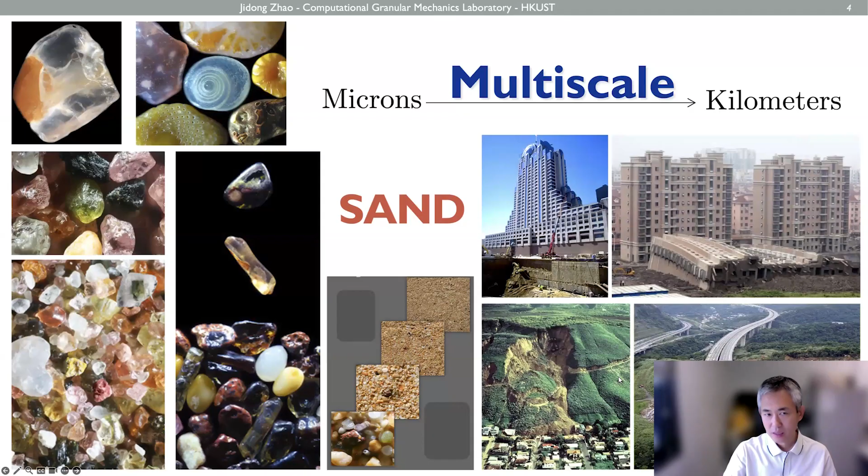Another nature is multi-physics. Granular media is quite often a porous media, and the pores can be filled partially or fully saturated with water. These different phases of fluid can interact with the sand particles in a quite complicated way, with significant engineering impact.

So the focus of my talk today will be on these two aspects. First, how we can do multi-scale modeling of sand. I first wish to present this multi-scale problem.

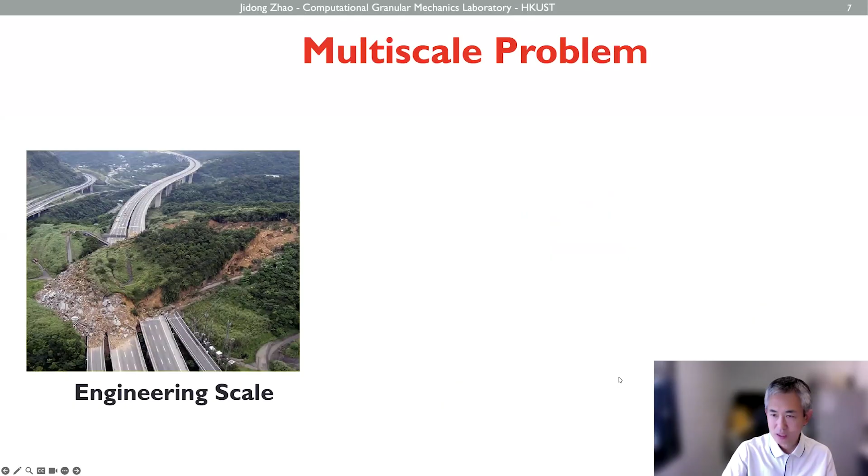We have a typical engineering problem like an engineering slope and landslide. That scale typically has a scale like several hundred meters and even over 1 kilometer.

Another scale that we typically deal with is the laboratory scale, where we take a soil sample to the lab, prepare samples, and do tests to obtain data. This kind of sample we call a representative volume element, or RVE.

Then going back down to the particle scale, there's the grain scale. The length scale ranges from kilometers down to the meso scale, typically less than 1 meter, down to 30, 40, even 50 centimeters, and then to the micro scale at the grain scale, which is a sub-millimeter scale.

So this multi-scale problem is quite challenging. The length scale has a range of 7 or 8 orders of magnitude.

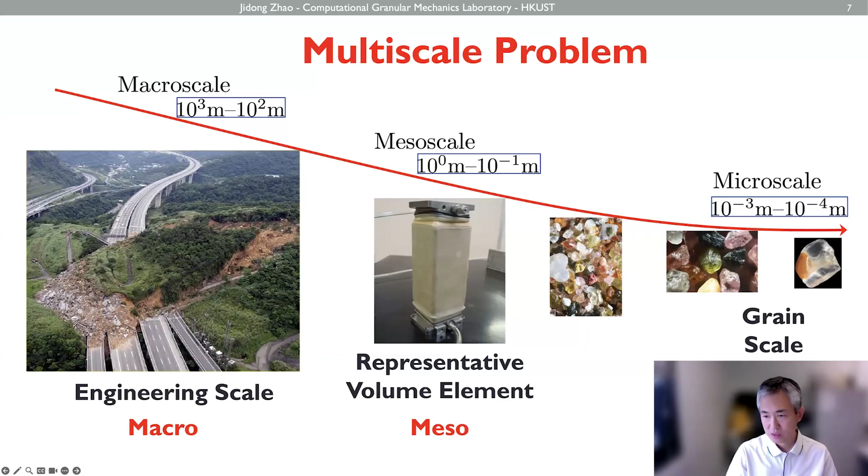Typically we give terms: the engineering scale we call macro, the RVE scale we call meso, and the grain scale we call micro here.

Traditionally, how do we deal with this multi-scale problem? We deal with engineering scale problems using so-called continuum mechanics.

For example, we propose a constitutive model, calibrate it using mesoscale RVE laboratory tests, and then implement the model into numerical code like FEM, MPM, or SPH to solve the engineering problem.

As Professor Ratna discussed yesterday, DEM basically offers a typical micromechanics approach for us to study the particle-scale physics of granular media and collectively evaluate their homogeneous response.

Typically we can use DEM, and sometimes people use MD or a physics engine for that purpose. So these are the different methods people use here.

For the continuum approach, the typical way people follow for an engineering problem is first to define the problem: whether it's quasi-static or dynamic, small or large deformation, whether we need to deal with strain localization and discontinuous deformation, or consider structure interaction, cracking, or multi-phase problems. These are the engineering problem natures we need to define.

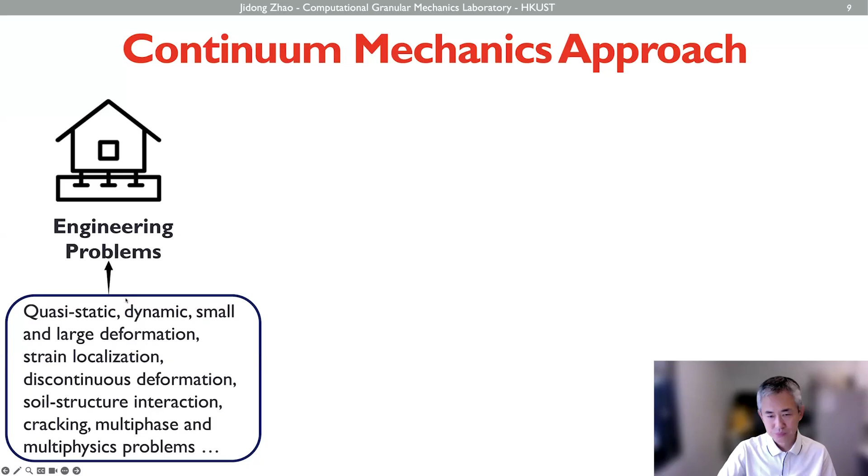Then we choose the proper numerical tools, including FEM, SPFEM which is basically smooth particle FEM, a variation of FEM, or XFEM which is suitable for fracture or discontinuous deformation simulations, or MPM, SPH, EFM, and others.

Once we do that, a key point is that in this continuum approach, at certain points like the FEM Gaussian integration point, we need to assume a constitutive model to represent the constitutive response of this continuum medium, typically based on continuum medium theory.

And then we consider either rate independent or rate dependent constitutive models and other features. We put this constitutive model at the Gaussian integration point. Then, of course, the model parameters need to be calibrated, and then we solve the problem and get numerical results. This is what we do here.

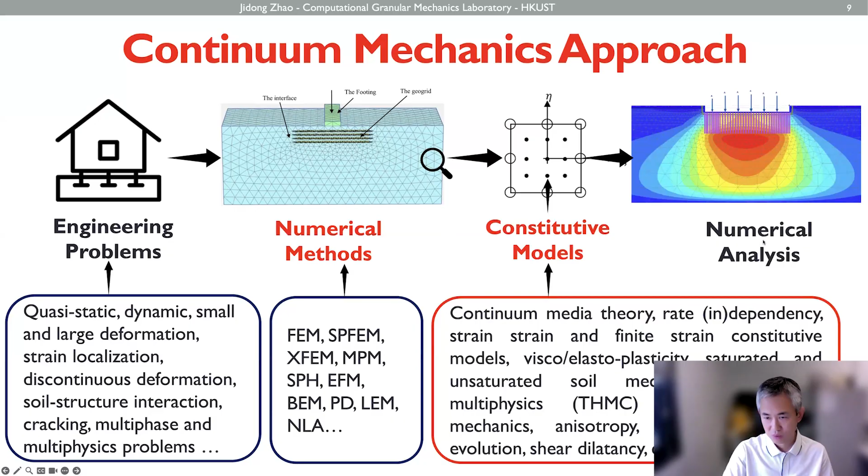So from engineering problem, we choose a numerical method, then assume a constitutive model for each Gaussian integration point, and then get a numerical solution. These are the typical continuum mechanics approach that we follow here. This approach has been quite popular, or prevailing, for more than 60 or 70 years already. But it is not without drawbacks.

Essentially, what we do is assume a constitutive model, and this constitutive model has historically been developed over quite a lot of different model types. For example, back in 1678, the famous Hooke's law — the model parameters are plotted here, vertical axis indicating the number of model parameters involved, and horizontal axis indicating the constitutive model, continuum-based model, and their timeline.

So Hooke's law is typically pure elastic, a linear elastic model. It contains two model parameters. Further, if we consider failure, and incorporate a Coulomb failure criterion into it, we get a four-parameter model. Back in the 1960s and 70s, the modified Cam-Clay model and original Cam-Clay model needed six model parameters. And the famous hyperbolic model proposed by Duncan and Chang involved 10 model parameters.

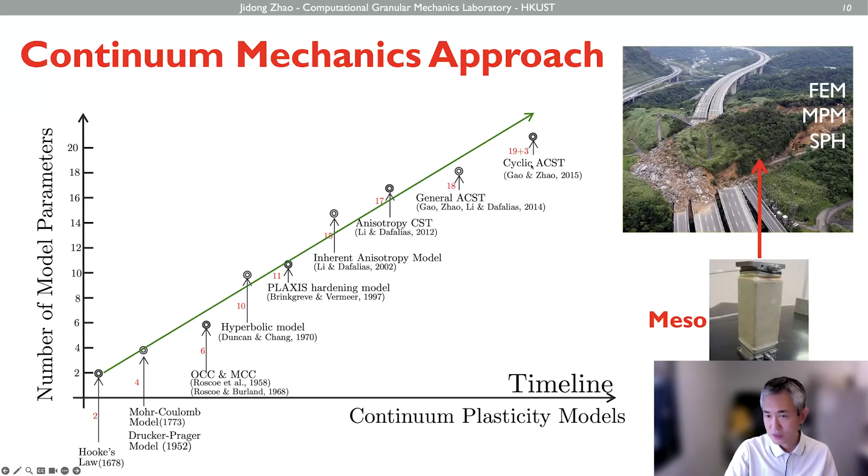So with so many model parameters involved, we most likely call this a phenomenological model. What does phenomenological mean here? It means that some model parameters have a clear physical significance so that we can design a definite laboratory test to determine their value. But many of these model parameters — for example, among these 22 model parameters, there are about 10 model parameters — don't have clear physical meaning, so we cannot design a certain laboratory test to determine their value directly.

So what we can do is basically test the soil response and get the experimental data, and then try to really fit the model prediction curve with this experimental data. This curve fitting process is mostly for those model parameters. And because of the involvement of those model parameters in such a complex model, the model is called a phenomenological model. So we actually rely heavily on this phenomenological model in the continuum mechanics approach.

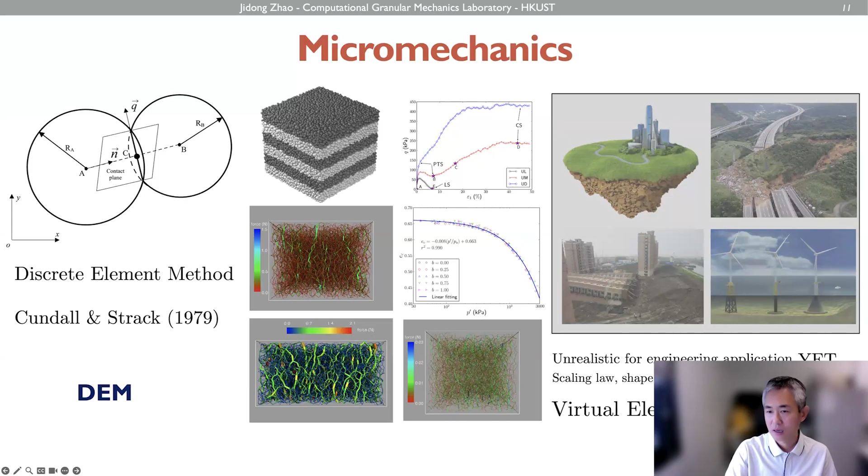So element testing is basically the laboratory small sample test here, right? And so the limitation for DEM applied to granular media problems is limited to a small scale and virtual element test here, right?

And so now we have three scales to consider at least. One is the engineering macro scale, representing a typical boundary value problem. Then we have the grain scale, and the particle scale, and then there's the laboratory scale here. And how we can really bridge these three scales together, and then relate this particle scale physics and mechanisms to explain this engineering scale or boundary value problem scale phenomena or observation.

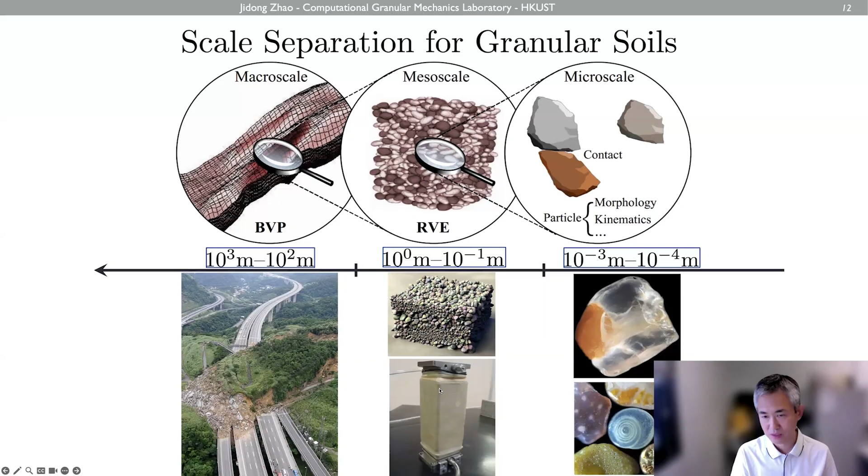And then we can use a so-called RVE scale that is really the bridge of them here, right? And so this is the key problem that we want to break the separate scales here, right?

Okay, and so as I mentioned in the previous slides, the current practice separates the two scales. Either we consider only the macro boundary value problem scale and RVE only, or we consider the micromechanics scale or the particle scale and only understand the material behavior here. So those are the different applications.

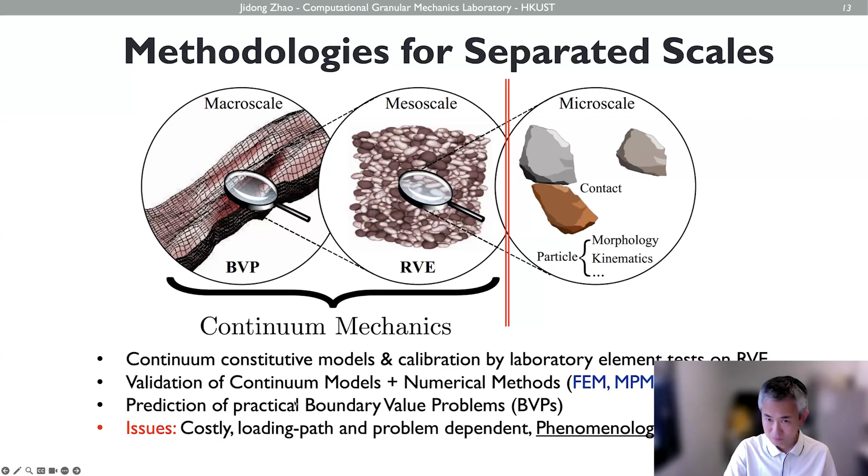The continuum mechanics approach typically features a phenomenological model, and needs laboratory tests. And then you also need to propose new models to account for different loading conditions here, right? Okay, so the whole process is very costly, loading path dependent, and problem specific here. So those are the other limitations for the continuum approach.

And then for micromechanics, we can faithfully consider the mineralogy and the morphology, surface attributes, contact, friction, rolling, sliding, breakage - those particle scale physics here, okay? And then we can use DEM or other approaches for that, for a better understanding of how this particle scale physics plays a role.

But as I mentioned, it's quite computationally expensive, and there's difficulty at many levels for characterization, and also how to really map this physical image to a digital one - you always lose some resolution here. So it remains to be a virtual element test at best here.

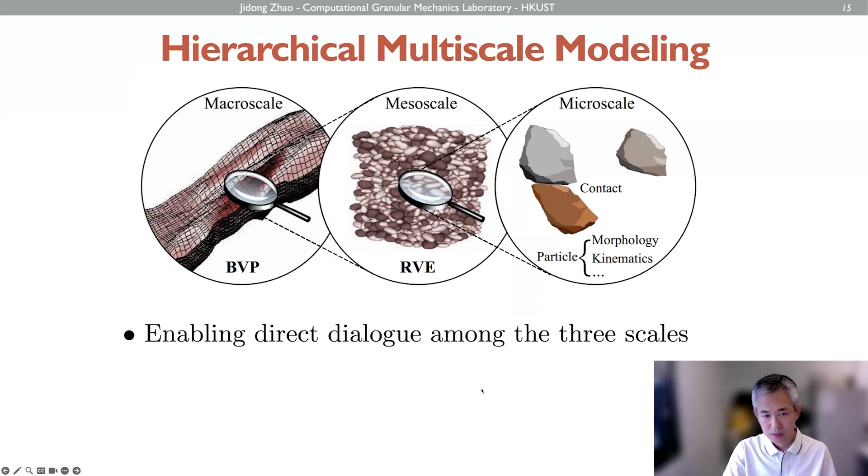Okay, so our goal is to break these boundaries separating the different scales here. So we want to have a direct dialogue among the three scales here. And then it's going to be unique for granular media, because you would see that multi-scale or homogenization is quite a fancy word for many other engineering sciences, like material science.

They do homogenization, but that's quite different from granular media, because for those material sciences, they want you to design an engineering material with a microstructure, for example. And the microstructure typically is periodical, and they don't have such features that are quite unique for granular media, like loading and history dependence here. So for granular media, we don't have such a periodical microstructure that we can assume or develop.

And then we need to capture the load history, loading history, and path-dependent features, and also the multi-physics nature - the pores can be filled with pore fluid, or pore liquid and gas here. Okay, and also we need multiple information passing, so-called multiple information passing, which is in contrast with material science - they design microstructure.

They only want you to do it bottom up - want you to estimate the continuum level material property. This is one-way information passing up.

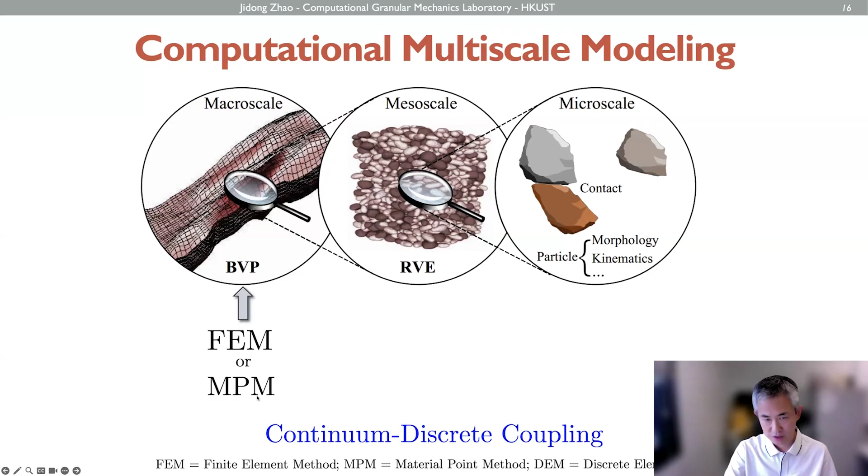And then at the RVE and particle scale we use DEM typically, and then we couple this DEM with FEM or MPM together in a hierarchical coupling way. And this is what we call the continuum-discrete coupling here, right? Okay, and in that coupling, we can really make full advantage of both scale approaches, like FEM and DEM, okay, and then tackle this multi-scale problem there.

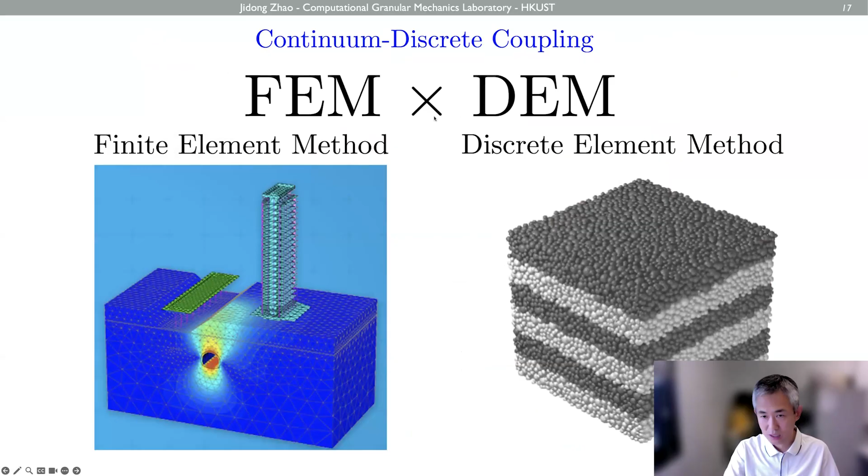And so this is the way that we use a typical finite element method and a typical DEM in doing a coupling. Here the coupling means that it's going to be a hierarchical coupling. What is hierarchical? In this way, just as a demonstration, FEM can solve a lot of boundary value problems as I showed here, and later on I'll also show some features, okay?

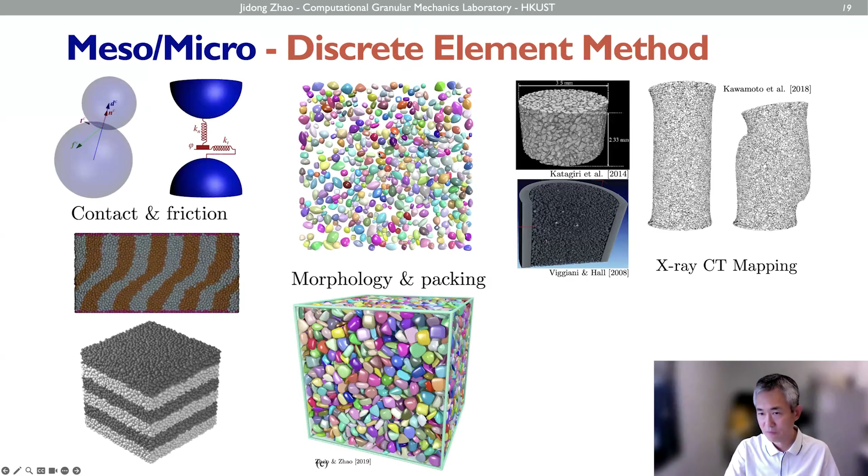And the DEM can really use the particle contact levels, grain-scale physics, and we can also replicate the different shapes, and the shape can be more realistic mapping from this X-ray CT, or consider other particle-scale physics. So here's the way that we do the coupling. And we call it hierarchical, meaning the hierarchy of this length scale here, right?

At the engineering boundary value problem scale, we still use FEM to discretize the whole domain by FEM mesh here. So at each material point, or integration point, of this FEM mesh, we put a discrete element assembly as a representative volume element. And this RVE is going to receive the corresponding deformation and other state variables as the boundary condition. This boundary condition is prescribed on the RVE, and then we load this RVE at its boundary and get a deformed RVE.

From this deformed RVE, we can extract, or we call homogenize, the required quantities like the updated stress and the tangent operators, which are required by the FEM. And then we can use these quantities extracted from the RVE, from the DEM solutions, to feed the FEM solver and further advance the FEM computation here. Right? So this will form a loop, because during the calculation we need certain numerical iterations to reach equilibrium, right? And we apply the load in an incremental way.

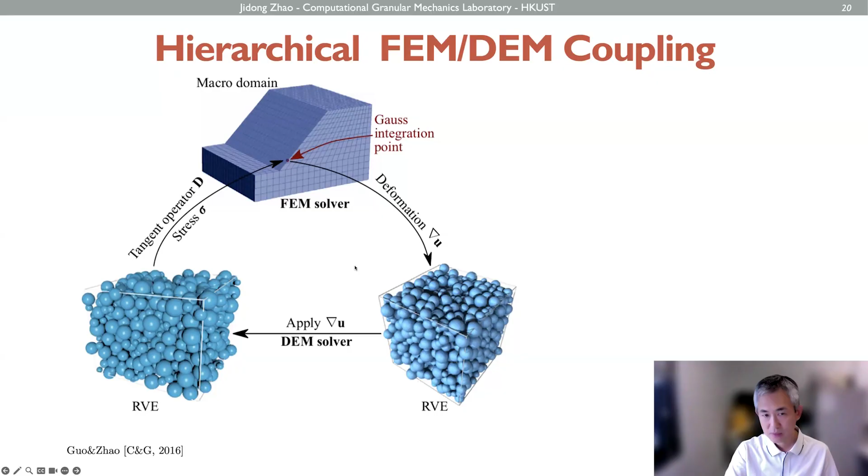But the whole idea, the advantage, is that it helps us to bypass the continuum phenomenological assumption, and we can also consider to certain degrees the detailed particle shape, friction, and other features as we wish. It's going to be top-down and bottom-up. Top-down means from the FEM engineering scale to the RVE scale, and further from the RVE scale to the particle scale. And it's also bottom-up, meaning that we homogenize the particle-scale interaction from the RVE to get the engineering-scale material response that is needed for the FEM computation here.

And so in this loop we can establish a direct link between the macro observation and the micro physics here. Okay. And because in the whole process we still respect the particle-scale physics of the granular material, we can handle loading path and state-dependent behaviors in quite a natural way. In the whole process, the computation will memorize the previous deformed configuration of the RVE, and this makes the so-called loading path dependency naturally followed here.

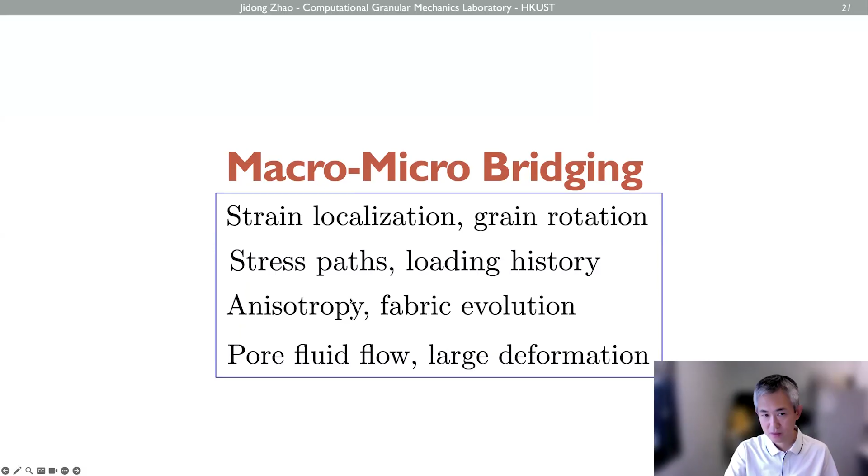I'll give you one example of how we can really establish a micro-macro bridging. I use one typical phenomenon that we have observed quite often, strain localization. Okay, and to show how we can relate particle-scale physics like rotation, anisotropy, fabric evolution, even pore fluid flow, to the observation of the shear band here. I use this as one example.

Here we consider a laboratory biaxial shear test. This is the specimen, and we discretize it by FEM mesh, a rectangular mesh here. On the two sides we apply the confining pressure, the bottom center is fixed, and on the top we apply a loading platen. The loading platen can be smooth, or we can make it rough. Smooth means that it can spread laterally, and rough means that we restrain the lateral spreading here.

Okay, and then instead of assuming a constitutive model, now at each Gaussian integration point of this mesh we embed an RVE. This RVE is generated by non-spherical particles. Now we use these peanut-shaped particles to generate the assembly. This assembly can be generated with different preferred orientations of the bedding plane.

And then the bedding plane: this is the bedding plane in a horizontal direction, this is at 45 degrees, this is at 70 degrees, and this is random, meaning it is more or less isotropic. So we want to consider the initial anisotropy of these samples. How does that affect the response here?

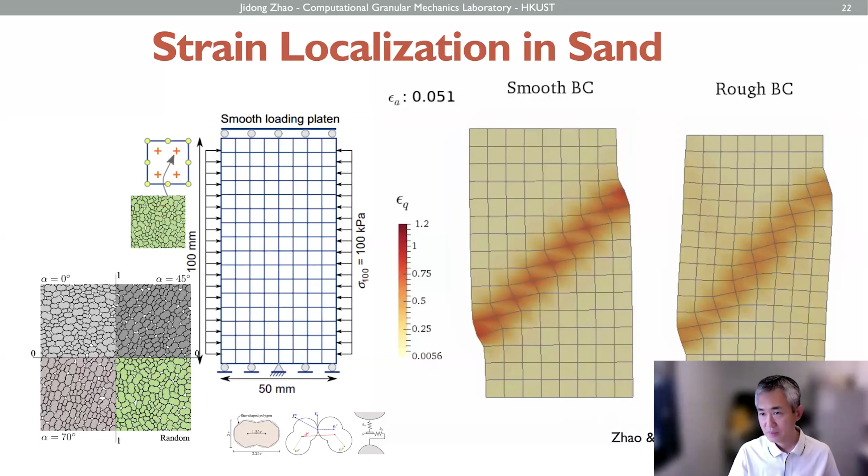On the right are these multi-scale simulations with smooth boundary conditions and rough boundary conditions, in two cases here. As you can tell, in the smooth case one single shear band occurs. In the rough case, at the beginning you also have a single shear band quite similar to the smooth one, but later on with the rough boundary conditions you have a secondary shear band, and eventually they form a cross-shaped shear band, which is different from the smooth case here, right?

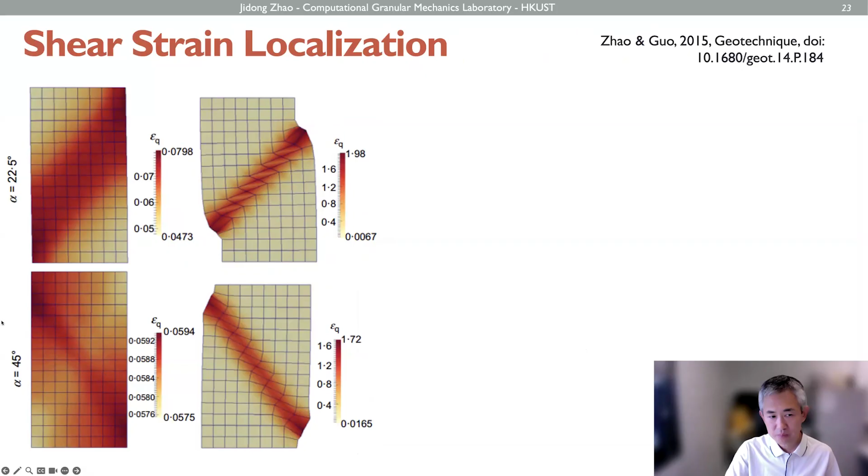And so even for the smooth case, with different bedding plane angles, like a 22.5 degree bedding plane, we have a shear band along these directions. If we consider a 45-degree bedding plane, then the shear band will form along this direction. And then for the rough boundaries, this is how the primary and the secondary shear bands occur here. Essentially, this has a close correlation with the shear force, the shear stress developed along the top surface by this rough platen.

Essentially, at the beginning you have a relatively symmetric shear force developed when the sample is pushed down, and then with the development of the dominant or primary shear band, the reaction shear force applied to the sample will be dominantly from left to right. This will be further reduced, and then it changes direction slightly, and when it changes to a certain direction and magnitude, the second shear band will occur. There's no shear reaction force in the smooth case, so there's only one dominant pattern here. So this basically explains how the boundary condition affects the formation of the shear band here.

We could also establish some correlations here. Typically for shear bands in granular mechanics studies, we use shear strain or deviatoric strain to represent them. With this multi-scale modeling, we can derive more parameters and homogenize them. One is the so-called particle orientation-based fabric. I mentioned it on Monday; it's defined by the peanut-shaped particles' preferred orientation, and we sum up the orientations to get this fabric tensor. It's called the particle orientation-based fabric, and we take its second invariant, FP, to denote it. We find this fabric FP correlates with the shear strain very well, and it can be used as an equivalent variable or indicator for localization.

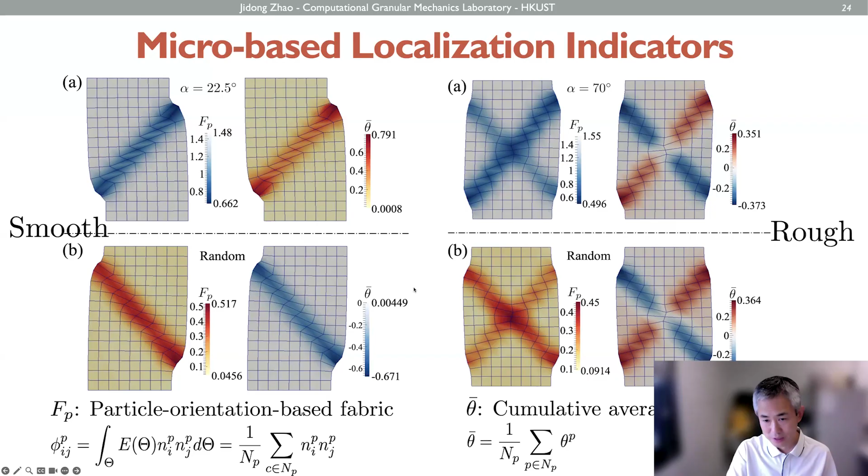Also, I want you to see this multi-scale approach, the so-called macro-micro bridging here. We look at the smooth case. In the smooth case, we develop a shear band like this pattern here, and then we wonder what the difference is between a material point within the shear band, like B, and a material point outside the shear band, like A here.

Then we further look at point A here and its response. We track its stress-strain relations. These are the typical stress-strain relations, right? It's loading and unloading here. Its dilation curve also goes this way, loading and unloading here, right? And the stress path or loading path goes this way, loading and unloading here.

And also we monitor this fabric anisotropy: one we use is particle orientation based, the other is contact normal based. We find the particle orientation based one has nearly no change at all, but the contact normal based one will evolve like this and get back here.

Also, we look at the so-called microstructure. Here, the dashed line square indicates the original RVE size at the beginning of the loading, and then the contact network is indicated by these bars, and as you can see the particles inside, and these are the strong force chains and weak force chains as I mentioned before. And then this indicates the end of the shear band for point A; this is the contact network here.

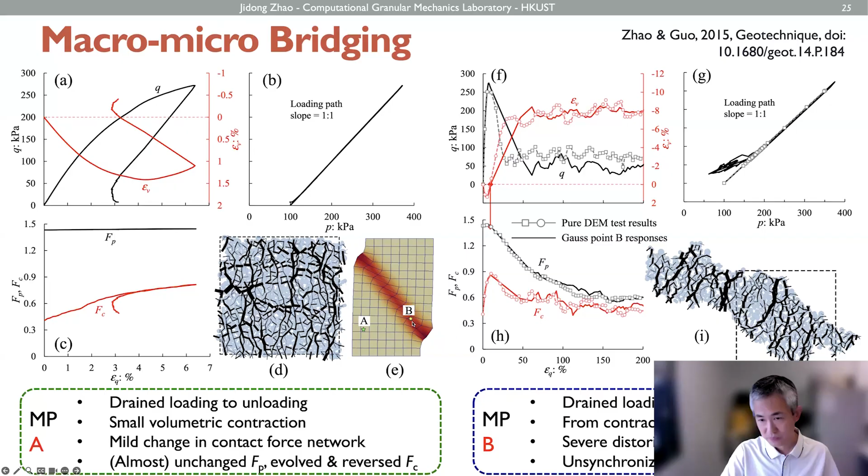Okay, we can also study other phenomena. For example, we can embed a relatively loose sample, initially loose, at a Gaussian integration point, and then we subject such samples to cyclic loading. We apply cyclic loading, the left and right are periodic boundaries, and then we can really use that to investigate liquefaction.

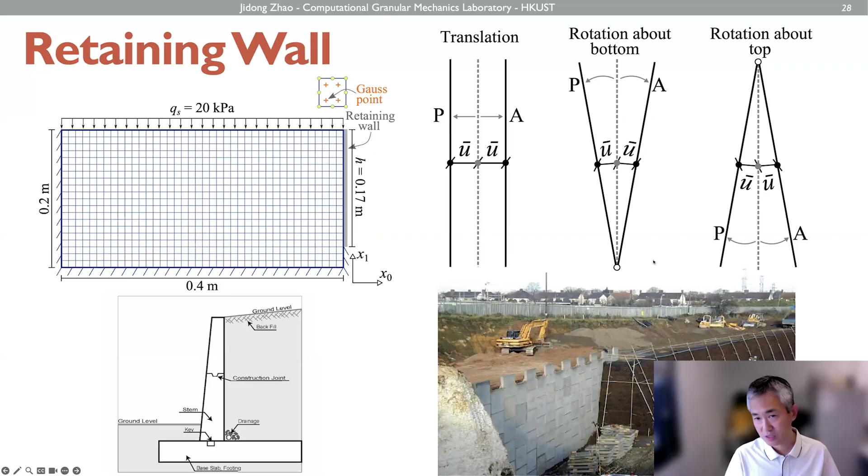So it will give us different shear band patterns, and this shear band phenomenon has been well studied in soil mechanics for a long time, probably over 100 years. People have developed theoretical solutions for validation here. So that is one example. We can use this multi-scale approach to predict retaining wall failure and the failure patterns here.

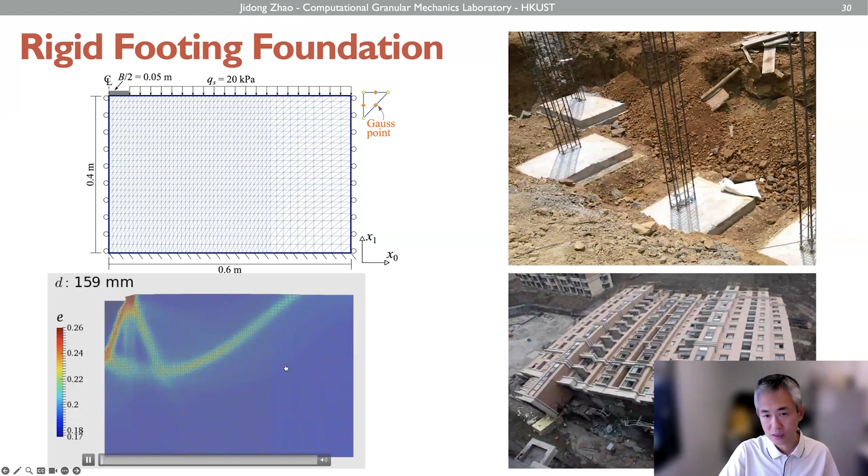This is a further comparison: we can compare our solution with the analytical solution, even for the rigid zone angle and the rotational shear zone angles here. And then we can further compare the microstructure change in the key area. So this is the rigid footing example, an important geotechnical engineering problem.

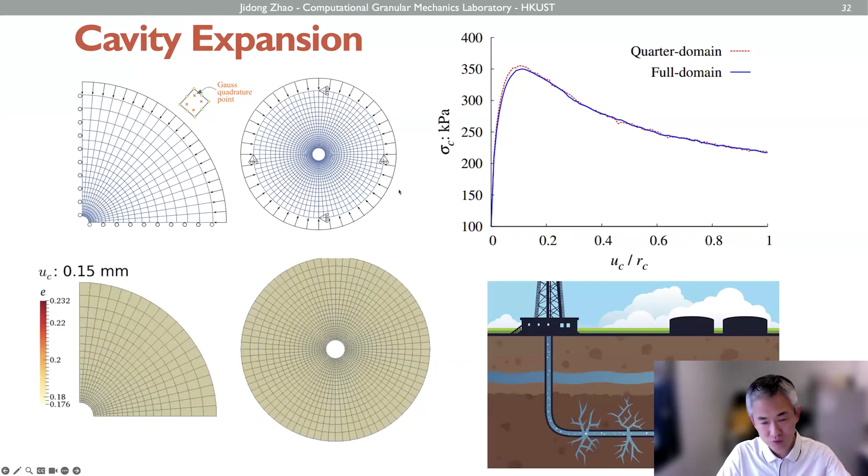In the previous examples, even the engineering problems, we assumed the granular material is dry, or if not dry, fully drained, so we don't need to consider the pore pressure influence. But quite often we need to consider granular material that is partially saturated or saturated. It becomes complicated. First, we consider the saturated case here. Ideally, we need to consider the pore fluid flow within the pores, like what I showed here. But I'm going to address that in a later lecture.

So here we want to introduce the very famous principle of effective stress introduced by Terzaghi in soil mechanics. He proposed that for a saturated granular soil, granular material, with an external load sigma, this sigma is going to be sustained or shared by two major parts. One part is shared by the interparticle friction, the interparticle contact force established among the particles. The other part would be by the pore fluid here.

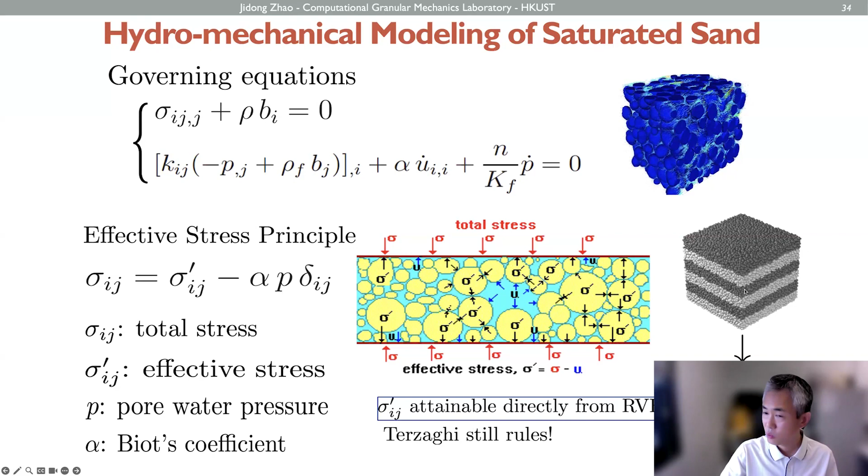We include this principle of effective stress by Terzaghi, and consider that the DEM results give us the effective stress. Then we use the famous Zienkiewicz and Chan's u-p formulation, where we consider global variables, including the nodal displacement for the global mesh and also the pore pressure at the integration points. We use that as two sets of unknown variables, and we prescribe the deformation at certain pore pressure levels, and we solve this RVE. After we solve it, we extract the effective stress and update it in the solving.

We can also extract the permeability. Permeability is related to the pore size distribution and pore size overall. We use a simplification, the famous KC equation, to extract the updated permeability. The effective stress and pore pressure also change because the pore size changes, the void ratio changes. Then we update the pore size, pore pressure, extract the tangent operator, and we can solve this FEM for the saturated hydromechanical coupling problem. Okay, so this is how we tackle that here.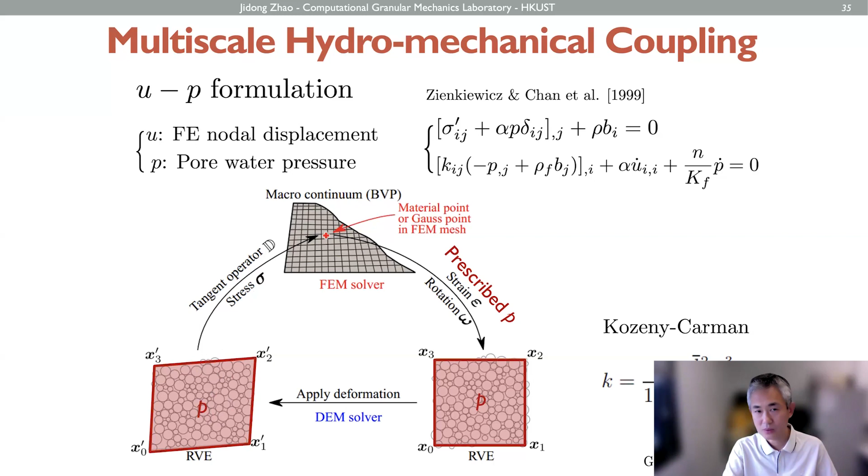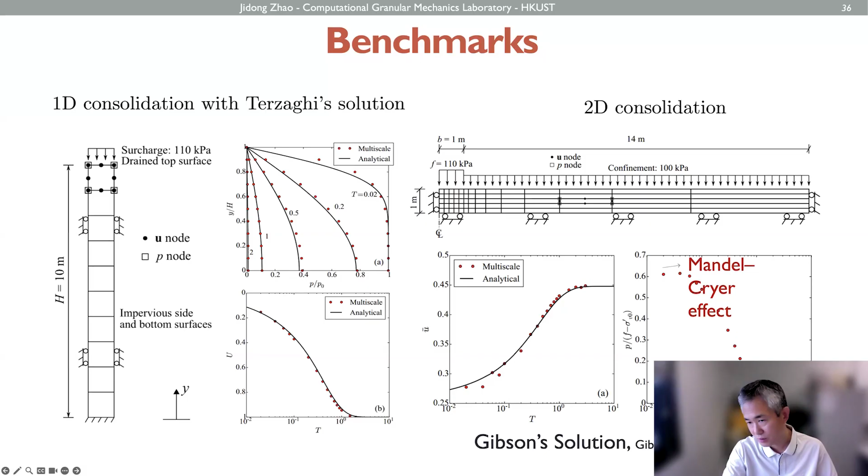So we updated this quantity, and we can benchmark against the very famous 1D consolidation problem solved by Terzaghi and compare to his results. It's basically a saturated soil column; we apply a surcharge, let it settle down, and during settlement the pressure will dissipate to zero excess pore pressure. This is 1D, and this is 2D, and in the 2D case we also have an analytical solution by Gibson, and we can also capture the so-called Mandel-Cryer effect. You have a slight increase of excess pore pressure, and then the pore pressure drops down to zero. So this is the benchmark.

Now we use this concept to look back at the same problem that we treated before. But here, instead of a dry specimen, we consider the specimen to be saturated sand. During the simulation, we assume we put a membrane surrounding the sample, so we won't allow the sample to dissipate any water. This creates a so-called undrained condition. The water cannot be dissipated out of the sample, but it can move within the sample.

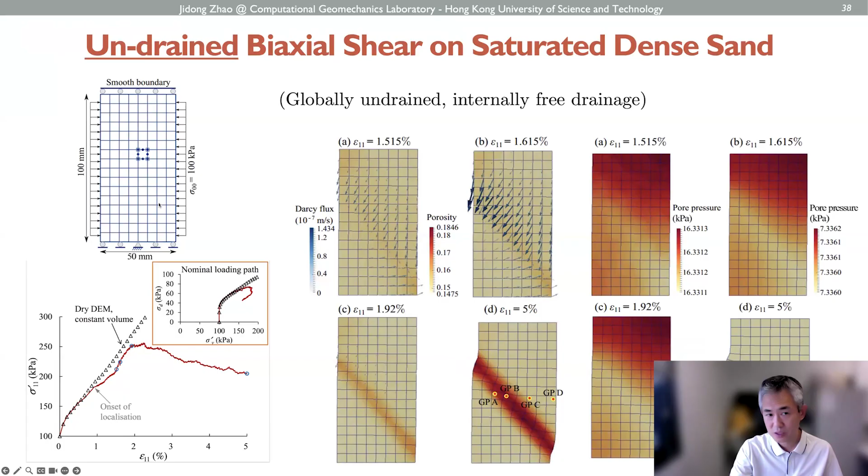Further, we wanted to show the same framework can be extended to other phenomena, like if we want to further consider temperature. We show here the thermomechanical coupling granular model, and what we do is show a figure using MPM.

Indeed, we can also use FEM. We consider two layers, one is MPM, the other is DEM, considering this displacement and also this temperature.

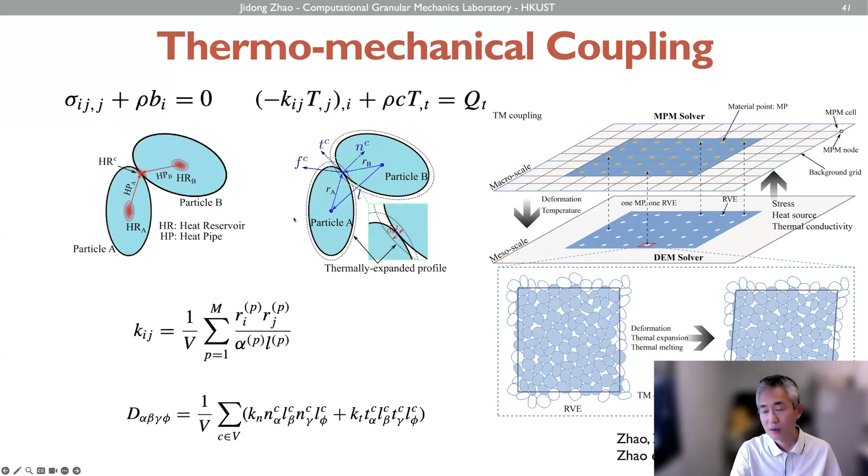At the particle level, we consider both mechanical response using the same contact model that Professor Ratna mentioned yesterday. But we also consider that each particle will serve as a heat reservoir.

The center is the reservoir center, and their branch vector will serve as the heat pipe. The heat conduction will transfer through the contact here.

From this mechanism, this thermal expansion model, once heat conduction occurs, it will change their temperature, and they will generate certain thermal expansion or contraction. This thermal contraction will further change the contact and also the overlap at the contact, which will change the contact force.

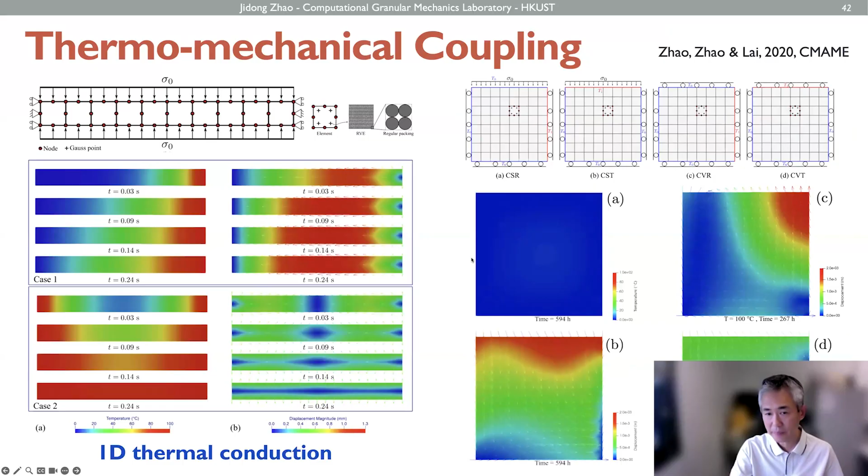We can further do some benchmarks. Here is basically a 1D expansion test, and a 1D thermal conduction test. On the right is coupled - we can maintain constant pressure but change the temperature boundaries, heat on one side, doing cyclic loading tests, or we load at this one and fix the other. These are basically the thermomechanical coupling examples we can show here.

These are further examples. Suppose we have a frozen soil, basically a soil with ice and a certain amount of soil particles. We heat the soil sample from the left-hand side, so the temperature increases, the ice will be melted, and the bond will be lost, which lowers down the strength of the frozen soil. It will generate collapse behaviors.

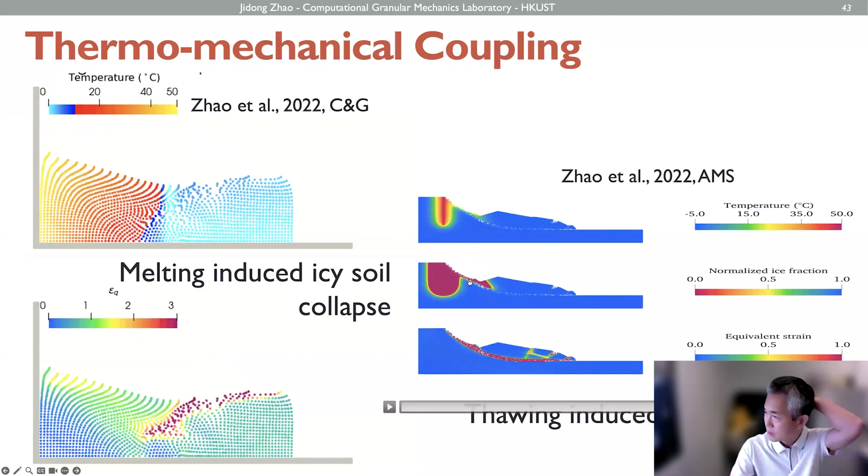This is a further demonstration example - suppose here is the thermal power source, and the increase of temperature will change the temperature field, and also affect this ice distribution, driving the soil slope to collapse. So this is what we call thawing-induced slope failure. This is a further demonstration of this process.

With that, I want to quickly demonstrate another extension - we can extend this multi-scale modeling approach to a cohesive granular material. By cohesive, I mean I'll use one example called high porosity granular rocks. The granular rock is quite an important rock formation. For example, a lot of petroleum oils and natural gas are stored in high porosity sandstone, which is basically a high porosity granular rock.

In this sandstone, a typical phenomenon is called a deformation band. You can have a shear band like that, but you can also have a compaction band. A so-called compaction band is basically where you have compaction, and a band forms perpendicular to the compaction direction - it's called a compaction band.

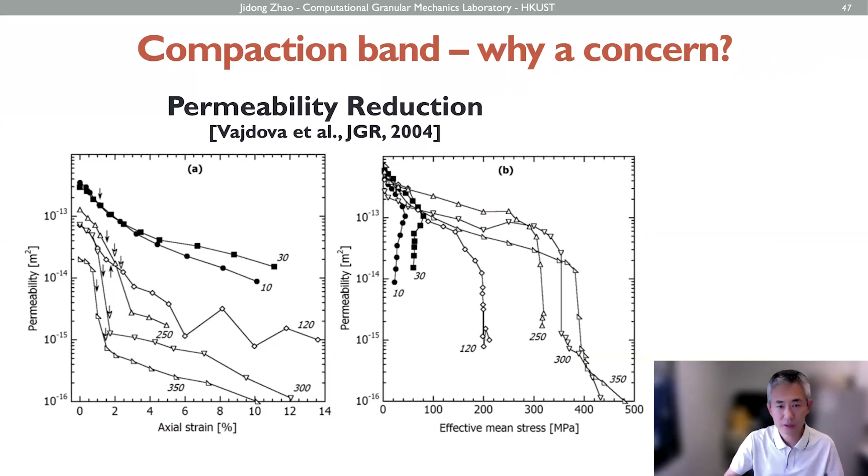This is quite a phenomenon, interesting in a way on its mechanism, on its physics itself, but also economically. The compaction band matters significantly to petroleum engineering, because according to some studies, once a granular rock, a sandstone, forms a compaction band, their permeability can reduce by several orders of magnitude, and then it can really reduce to the second magnitude.

This will affect the energy industry in a way that when we want to extract oil or gas from this sandstone, or we want to do CO2 sequestration, or for nuclear waste disposal, and for aquifer management, they all matter - permeability matters. That's why it's an important phenomenon.

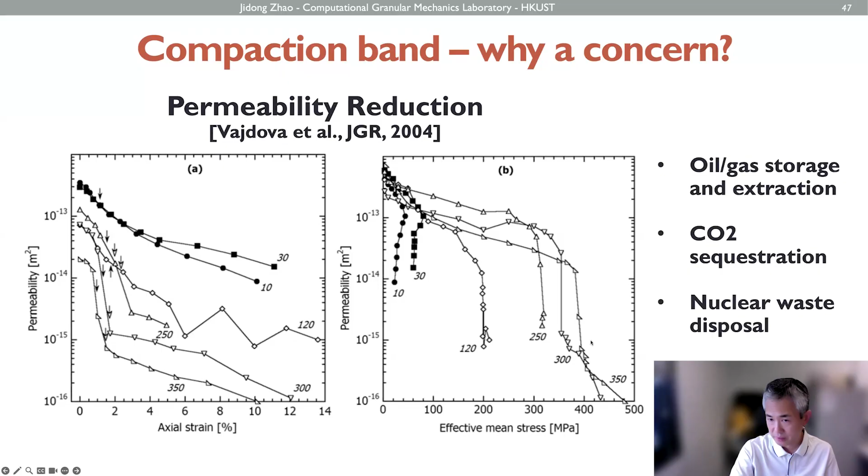We wanted to deal with this problem by multi-scale modeling, and then we consider granular rock formations as a boundary value problem. We take a sample RVE and incorporate the RVE level of physics here. So what we do is use the same framework developed by my former students Ning Guo and Huanran Wu, as I introduced before.

On the RVE level, we introduce so-called bonds, and we want to generate a high porosity RVE packing. We generate the RVE, with isotropic consolidation, and then add a cohesive bond between the contact points of the RVEs. We randomly remove some big particles to generate big pores in this RVE. Then we finally pack some samples to an initial stress level.

Here we develop a bonded particle model, and also here we consider a so-called dual porosity RVE. These are the big pores, and also within the small particles there are still small pores. This is what we call the dual porosity RVE.

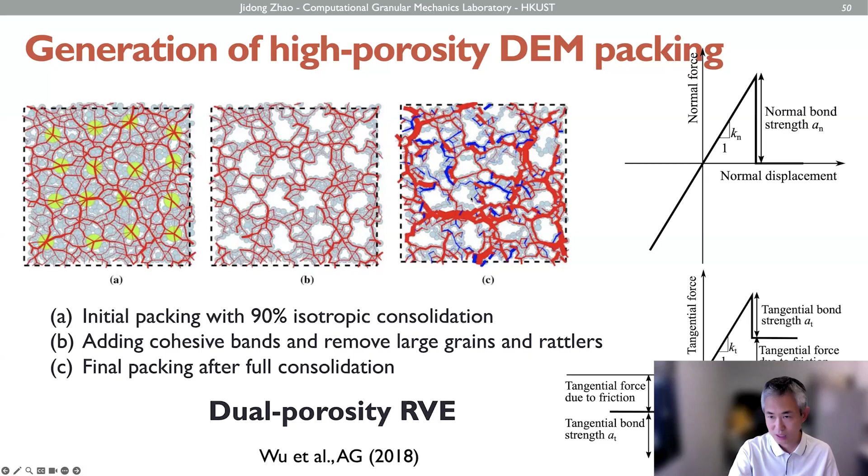We also calibrated this RVE microstructure with X-ray tomography. This is basically a limestone typically found in France, and we collaborated with the Grenoble lab to calibrate this model using their X-rays, and we also calibrated the particle density and other parameters. We tested the sample and compared with experiments, and they match very well on all the parameters we indicated.

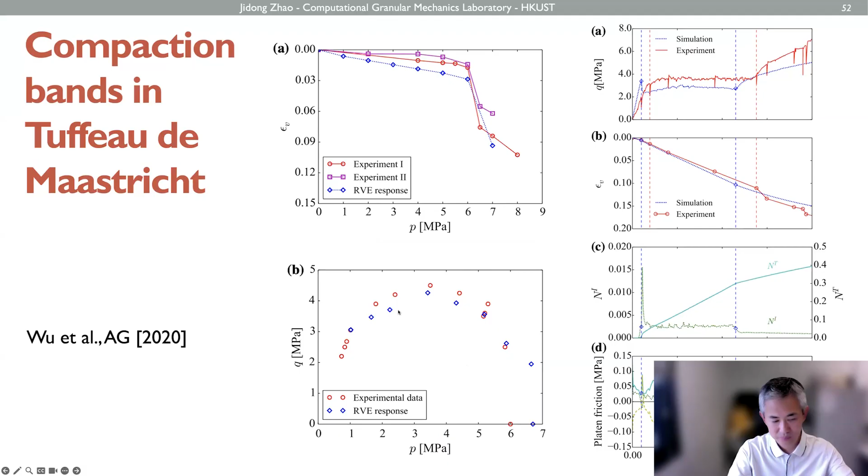This is the whole process where we produce this compaction band, the compaction front evolution. This is the further comparison.

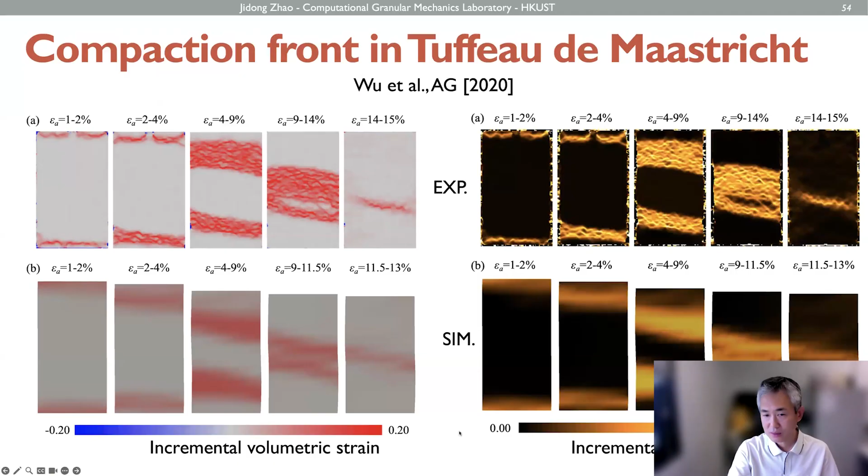On the right is experiment, on the left - sorry, on the bottom is our simulation, on top is the experimental results. As you can see, the correlation is quite consistent. This serves as validation that we can really reproduce the compaction front or compaction band formation in granular rock, in high porosity granular rock.

What is interesting is that geologists, geophysicists, and those working in petroleum engineering are interested in what conditions produce the full kinematic spectrum of deformation bands. The compaction band is what we see here - we compact from top and form a densified band in the middle. With different loading conditions, we can change from a compaction band to a shear band, pure shear band, and in between the compactive shear band or dilative shear band, and then to a so-called pure dilation band - basically you extend it and form a loosened, dilative part in the middle.

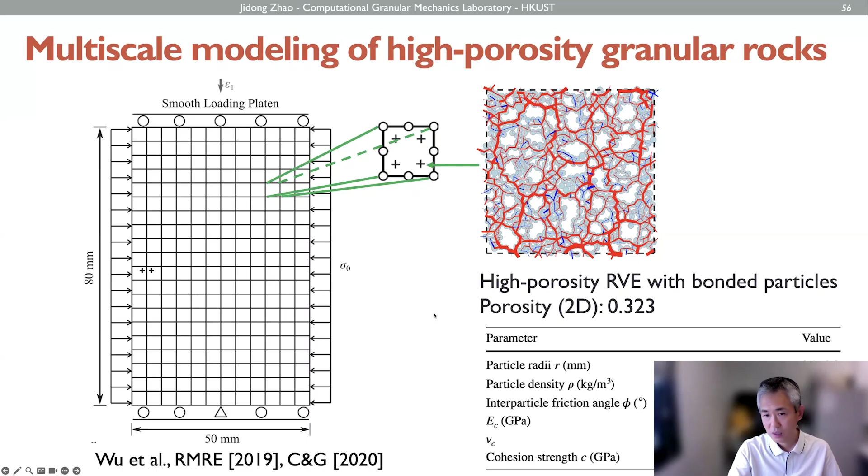So what we do is we want to reproduce this again, using such a setup and inserting a high porosity RVE at this Gauss integration point. This is what we generated. Then we apply different boundary conditions, especially confining pressure, to really get the whole spectrum of deformation bands generated by our RVE, by our multi-scale modeling.

If you use pure DEM simulation, you can never achieve that, because there are a lot of other factors that you need to control to really do that.

And so this is a typical RVE contact force network we can visualize from the different simulations. Compression band you can see here is purely volumetric compression. Shear band, you have certain shear deformation developed. This is a compactive shear band. This is a simple shear band. This is dilative shear band. This is a shear enhanced dilation band. Here is a pure dilation band, and you can see a big pore formed in the soil here.

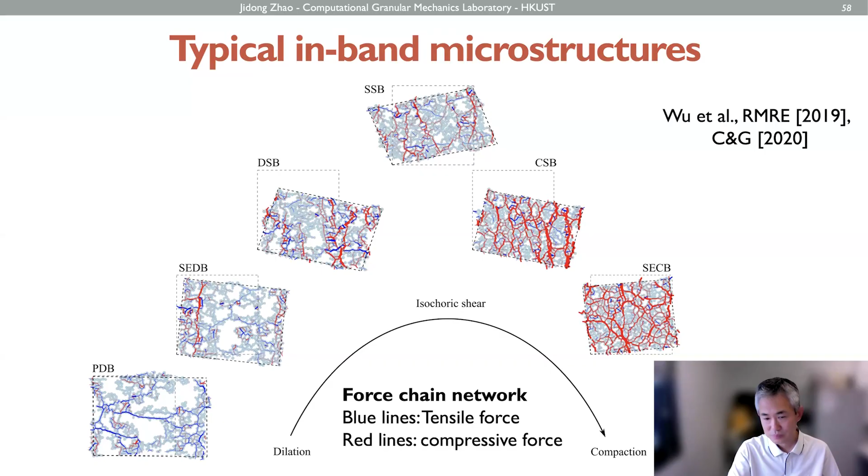And then we can also further use our approach. We can define another classification index. We use the volumetric strain versus the shear strain to define that. And with these factors, this can really help us identify the temporal changes of this shear band. This is another case. We have a shear band. We have a dilative shear band occurs.

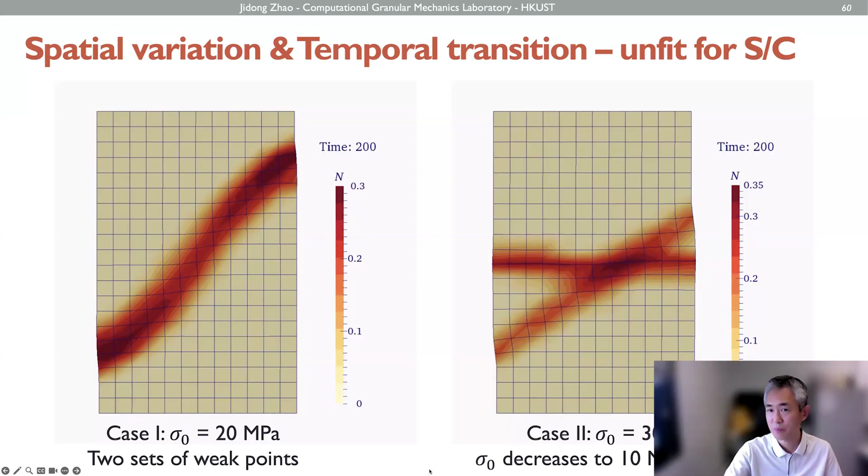If we further decrease sigma, the confining pressure from 30 to 10, at high confinement we have a compactive shear band here, but with reduced confining pressure, the reduction of confinement will first give us a compaction band, and then you will further develop a shear band like this one, which still remains compactive shear band. So this is a way we can use that index classifier to distinguish different mechanisms, and identify which area indicates a compaction band, and which one is a shear enhanced compaction band or a compactive shear band. Different evolutions give us quite distinctive patterns, allowing us to identify the different mechanisms and understand this phenomenon in a much clearer way than before.

Here is further illustration of this microstructure changes related to different processes. And further, we extend this to a saturated sandstone case in a similar way as shown for the previous hydromechanical coupling. Essentially we use the same RVE but consider the pore pressure as a global variable to be solved, still using the Terzaghi effective stress principle for the RVE.

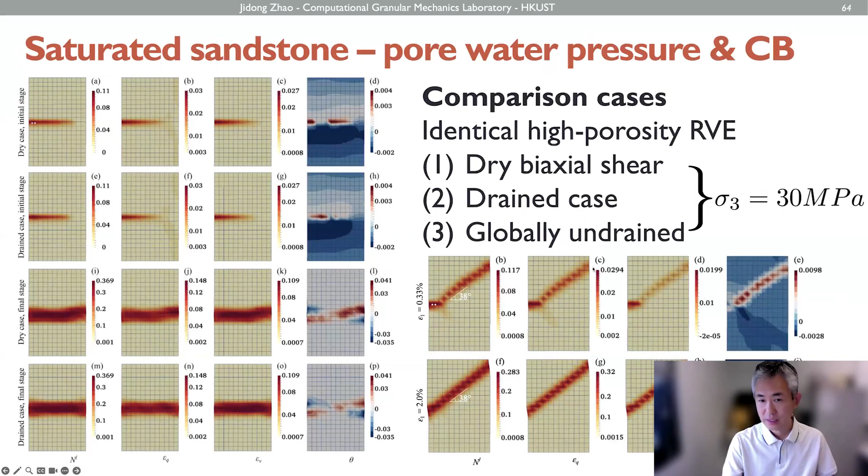This is a comparison here. We consider three cases with the same RVE: one is dry, one is drained, one is globally undrained, all at the same confining pressure. So this is a comparison of the dry case and the saturated undrained case. For the dry case, you form a clear cut compaction band, where the microstructure compresses mostly, as you can see here.

And then for this saturated sandstone under globally undrained conditions, at the beginning you have initiation, but it quickly develops into a shear band. This is what we call a compactive shear band. For this point, it initiated from this position, at the beginning slightly compaction, but quickly transitions to this shear band pattern. As you can see from this RVE, the shear deformation is quite evident and clear. So this way we can capture the subtle influence of reduction in confinement pressure, and how that totally changes the shear band patterns.

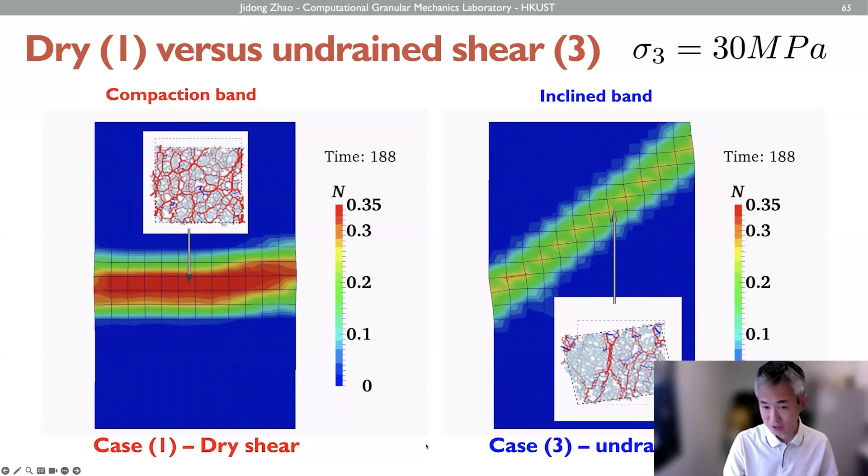We can further look at how the compaction and shear distortion develop in the two comparison cases. This further indicates that with another confining pressure, a shear band forms. The compression band formed at the beginning when compacted, the density, the porosity is reduced, so the water within the pores is squeezed out. You can see the Darcy flux flow out here. Later on, you can further develop a compactive shear band, and you can see here this compactive means there's still some small amount of Darcy flux squeezing water out of this shear band. So this is basically a deformation band transitioning from this compactive band to a shear band.

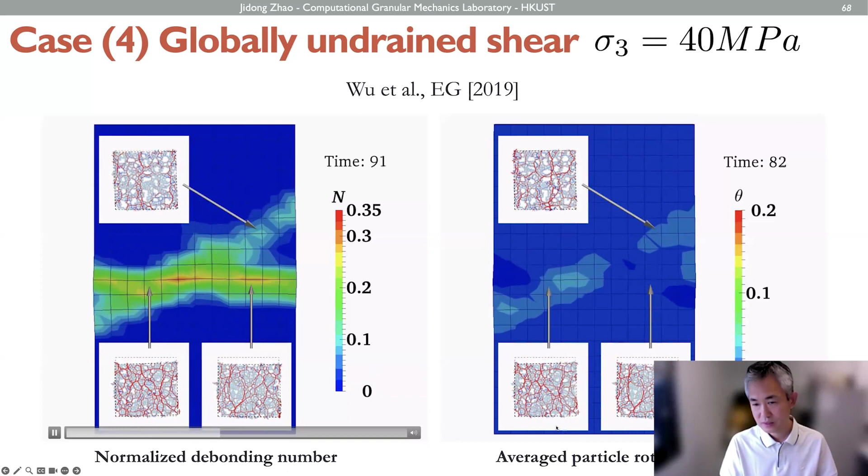And so this is further comparison of the two cases. Same case, but we use this debonding number, basically the bond between particles that were lost. We count that. This is the compression, and then later on it forms a shear band along this one. This is the average particle rotation. The particle rotation is quite clear and evident during shear band formation, but not so along this compression band case. The rotation is not evident for this compaction stage, but for the shear band case it's quite evident.

And then this is further the Darcy flux and pore pressure variations. So Darcy flux when the compression band occurs, and it's ready to squeeze the water out quite clearly, and this is the pore pressure change. And then later on, it really forms the shear band along this direction. In the shear band, again, the water will still be squeezed out because it's densified within the shear band here.

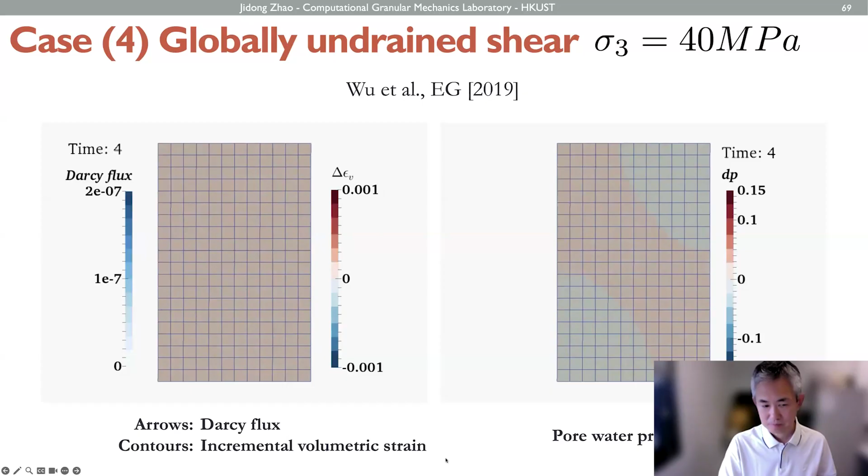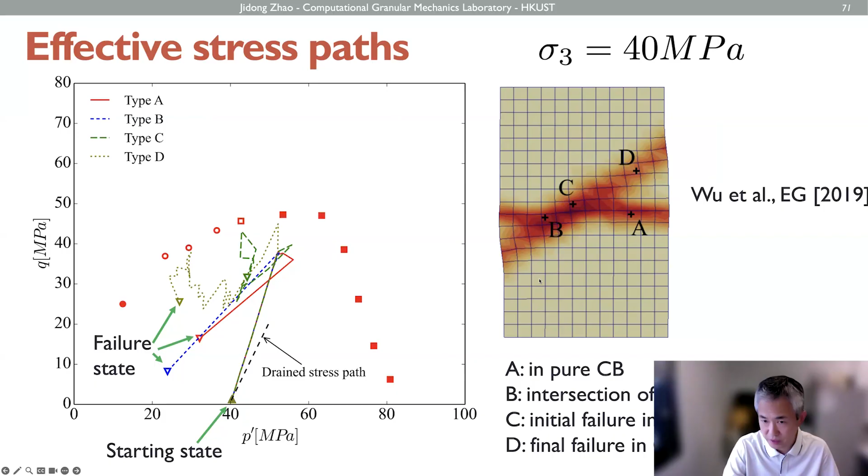And then there's the further quantitative analysis. We can see how, during this undrained shearing, the excess pore pressure will affect the stress regimes, and then change the band formation from a compression band to a shear band here, which I'm not going to discuss in detail here. This is another plot to indicate how the stress path changes, just because this developed excess pore pressure will lower the effective stress, and then cause the band formation condition to change from compression band to shear band.

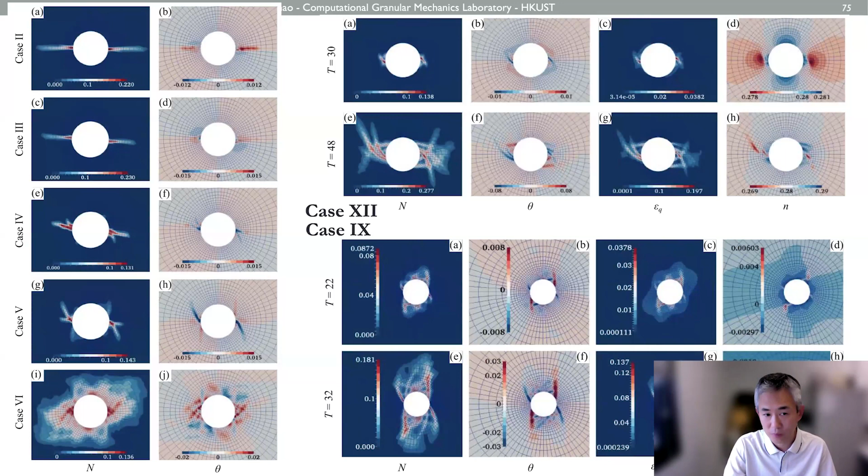Okay, so here we further use that indicator to differentiate the different band relations, and we can further use that to simulate borehole failure problems in petroleum engineering, and this is called a slot or fracture breakout. You can create a borehole, and then at certain positions it really breaks out and forms a fracture here. This is experimental observation. This is our simulation for the breakout, and there are a lot of features that we can reproduce. These are further variations if we change the boundary condition, the in situ stress, and their formation can be totally different.

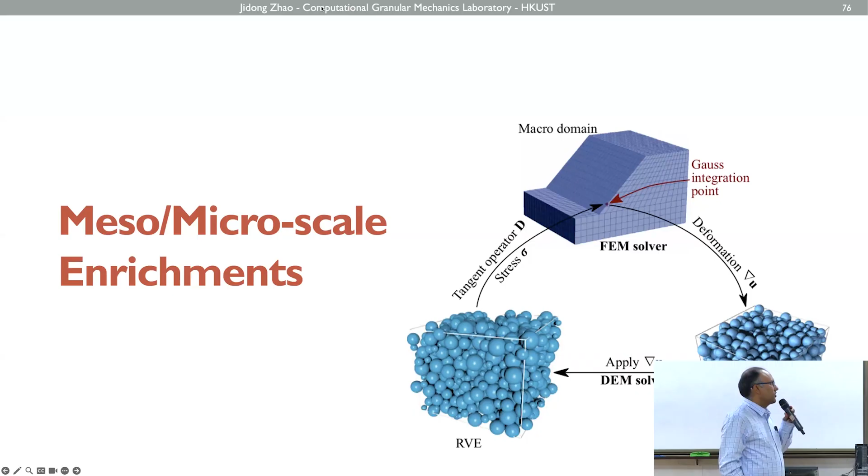Okay, and I think we probably need to have a break here, right? So, it is now 10:45. Shall we take a break, and then after your lunch we'll resume? What do you think? Yeah, sure. Let's have a break, and I will continue after lunch, right? So we'll come back at half past 11 IST. Is that okay? Yeah, 45 minutes? Okay, so then we'll resume at 11:45. But before we close, can I open the floor for questions, if any? Sure. Okay, 1 minute. There seems to be a question here.

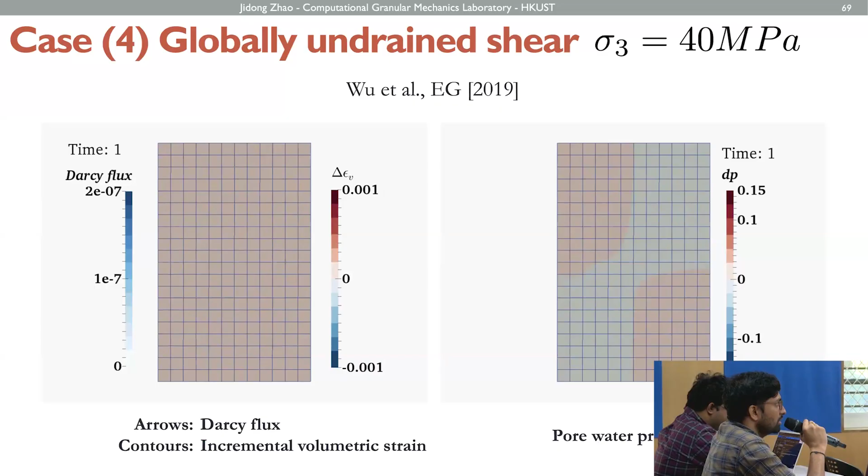Professor Jidong, I have a question regarding the boundary conditions in triaxial testing. You have performed both drained and undrained hydromechanical simulations. Can you briefly explain what kind of boundary conditions you have given for the drained case so that no excess pore pressures got generated within the system? For the drained condition, for this example, we don't think the pore pressure matters because any excess pore pressure will totally dissipate, right? So in that case, we treat it as equivalent to a dry condition. We don't consider pore pressure at all.

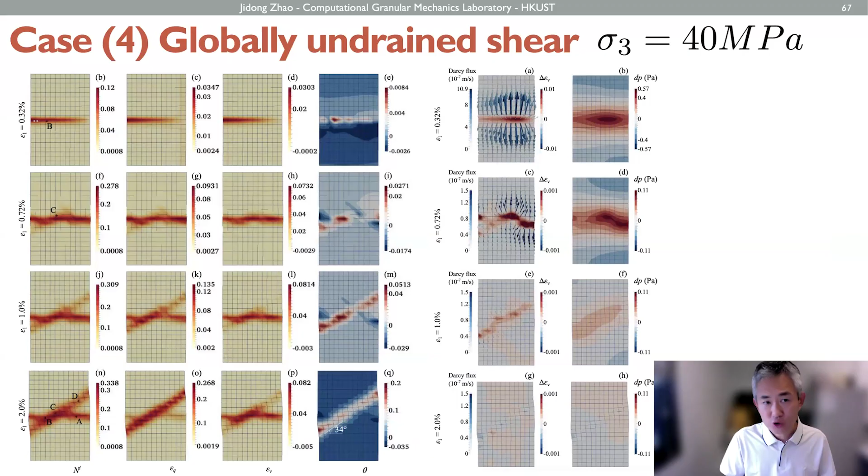But for the undrained condition, it's different. For these samples, the whole sample is saturated, and all four boundaries are undrained. We use a membrane to cut off the flux there. But within the sample, within each element, it's a freely drained condition. So the water can drain from one element to another element. So this is how we did it.

I understand the undrained condition, but for the drained condition, as you mentioned, it's hydromechanical modeling. I thought you might also be solving for pore pressures. No, we didn't. We actually did simulate that one, but we found that it has no difference from the purely dry condition for the totally drained condition. Yeah, because in the drained case, if we solve for pore pressures, we have to make sure no excess pore pressures get generated, which means the flow should be fast enough to drain under the loading. That's right.

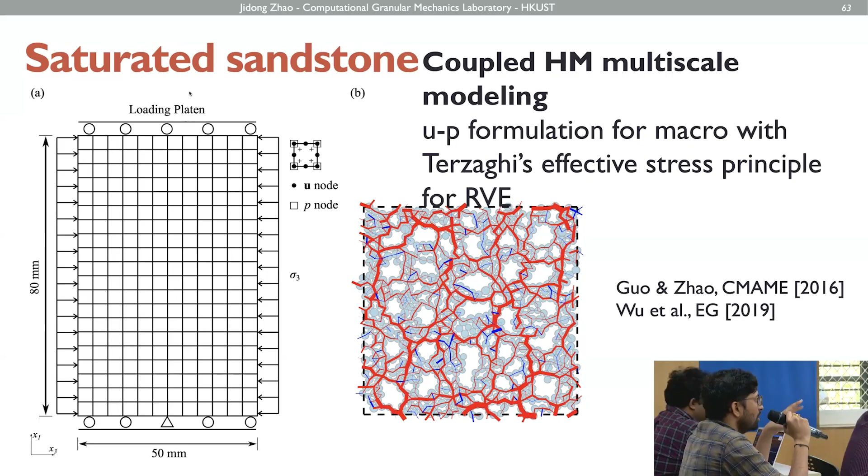So another question is regarding mesh sensitivity. You have performed a lot of simulations with a constant mesh, I suppose, because all the quad elements I could see in your simulations have almost a constant average size. Can you comment on how the mesh size affects the final outcome? Yeah, that is a very good question. Indeed, in our simulation, we still resort to the so-called first order finite element method, where we didn't introduce any gradient or other non-local features to resolve this mesh dependency. That's why we have done a mesh sensitivity study, to see that in our simulation this mesh can generate relatively consistent results.

So mesh sensitivity still persists in this problem. We didn't resolve it, and that mesh sensitivity needs to be resolved. Either you introduce gradient terms, or, for the multi-scale property, you can introduce another kind of what we call a Cosserat continuum model, and then put in the DEM simulations and use that to partially resolve it. Or at a continuum level, some people use smoothed particle FEM as a regularizer to the mesh, to mitigate this mesh dependence.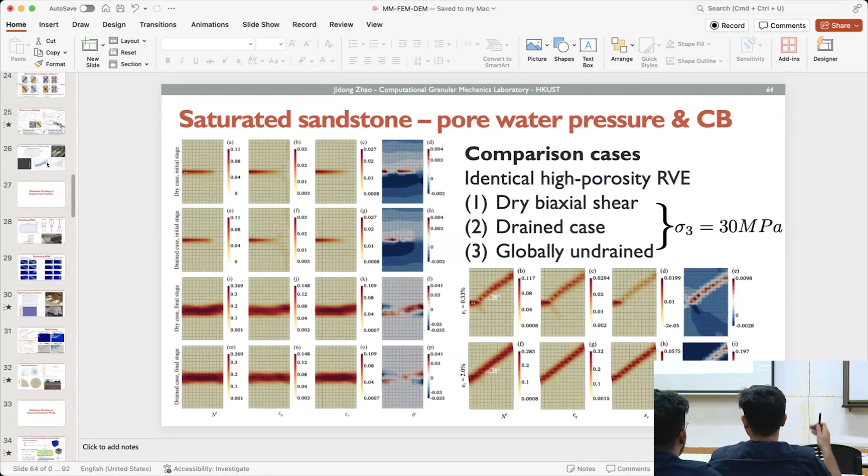In one of the examples you showed, the retaining wall problem, there was a smooth boundary condition also simulated. Any particular relevance in looking at those results? Because I'm assuming there will be high friction between the soil and the wall. Well, in reality, the experimentalists have done quite different setups. Smooth samples do exist.

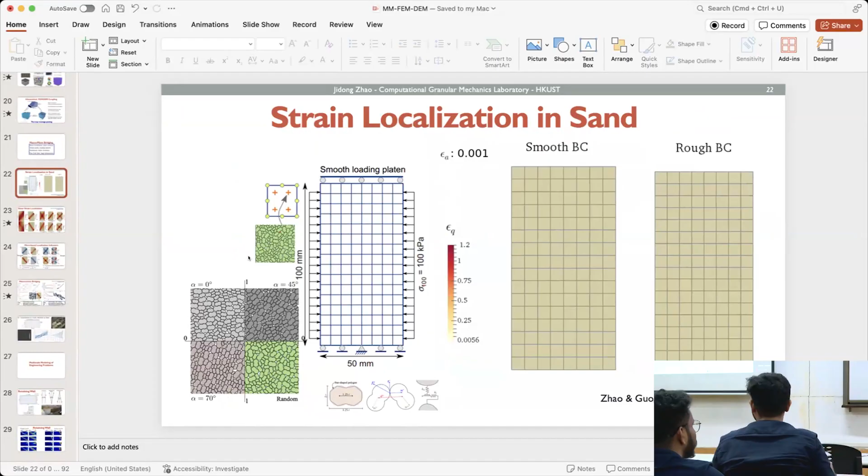There was a retaining wall problem. I forgot the slide number. Oh yeah, the retaining wall is an idealized situation here. The next slide. Yeah, we indeed wanted to look at the more realistic case with the rough boundary, and then the idealized solution with a smooth boundary, to look at the difference between the two extremes. One is idealized, which is not realistic. The rough boundary totally holds the sample. And we expect the real solution will be in between. So the smooth boundary condition is just an idealized situation.

All right. One more question: the cavity expansion problem. The next one. This one. I'm unable to understand the relevance of this. We are looking at the distortion bands in the soil, and what is the inference that we take? What are we trying to prevent or study in this particular case? Can you repeat your question? We are studying the deformation of the soil through this cavity expansion problem. What is the relevance? What is the specific engineering question we are trying to answer in this problem?

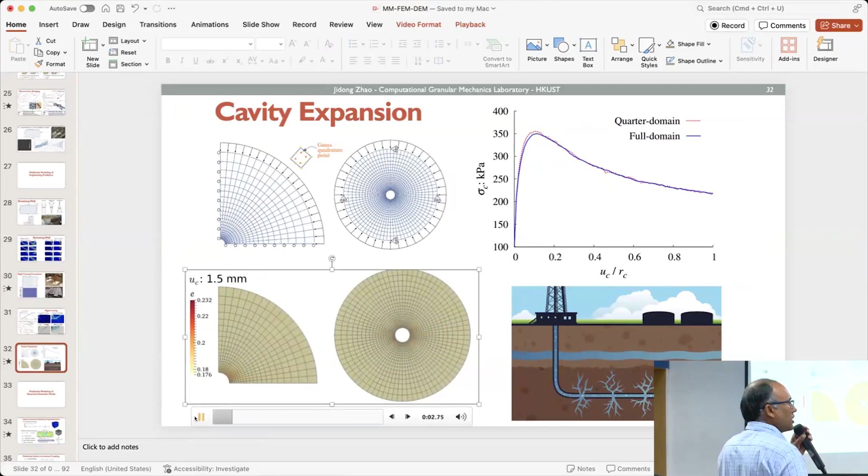Oh, indeed, this one is from petroleum engineering, where they look at borehole instability. For example, during the pressure rise stage, you want to maintain the borehole stable. But in the early days of petroleum exploration, they found the borehole can collapse just because you develop a certain kind of shear band at a certain place. This is called borehole instability.

So let's continue with the discussion of this multi-scale modeling by FEM and DEM. I really wish to emphasize the coupling framework, where we couple a continuum method like FEM with a particle-scale micromechanics approach like DEM. Indeed, we can take advantage of the benefits offered by both approaches. For example, we can incorporate any enrichment at the particle scale, at the RVE scale. This is what I'm going to show in the following: how we can incorporate any kind of advances in micromechanics, in DEM modeling, in particle modeling, into this multi-scale approach.

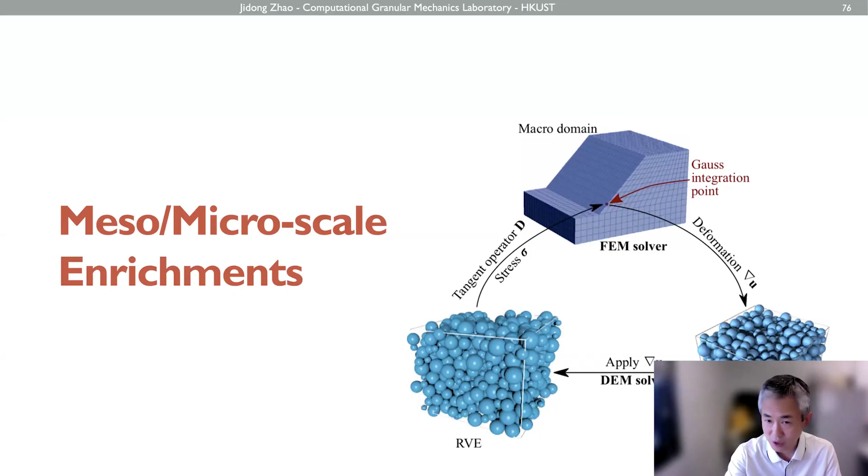For example, particle grain shape. In the previous examples, other than the first example, we used the peanut shape in 2D, and we can actually consider more realistic particle shapes. For example, we can use the so-called poly-superellipsoid. This is the approach developed by my colleague, research assistant professor Dr. Shiwei Zhao, with me. We basically use this mathematical expression for superellipsoids, and by choosing different parameters for epsilon, we can generate different shapes.

We call it poly because natural sand shapes are quite complicated. So what we do is cut off certain superellipsoids and stitch them together to form whatever shape is required by a natural sand. And we ensure that when we stitch them together, they retain their smoothness at the joins. So this is what we do here. For example, we can use a total of 6, 7 or 8 different parts of different superellipsoid shapes and stitch them together to form a shape. The shape is further validated against real sand like that one.

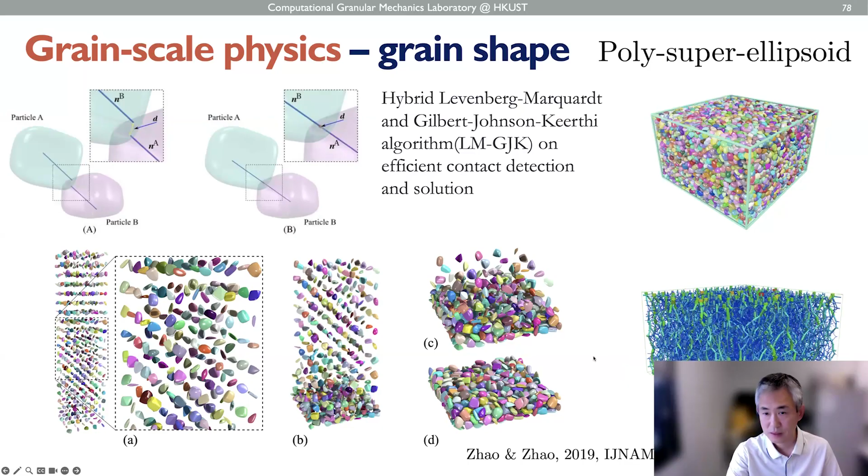And more recently, in my group, postdoc Dr. Zhengshou Lai used this so-called signed distance field method, which is a more robust approach. We can really cover all the previous methods we mentioned as special cases to generate realistic particle shapes, including poly-superellipsoids and poly-superquadrics, spherical harmonics, polyhedron, level set, and mixed shapes.

As you can see, here the polyhedron and this mixed shape can be convex, or concave and convex. Of course, with concave shapes the contact detection can be a challenge, but this SDF really helps to resolve the contact detection as well. This can be incorporated into the DEM for the multi-scale modeling.

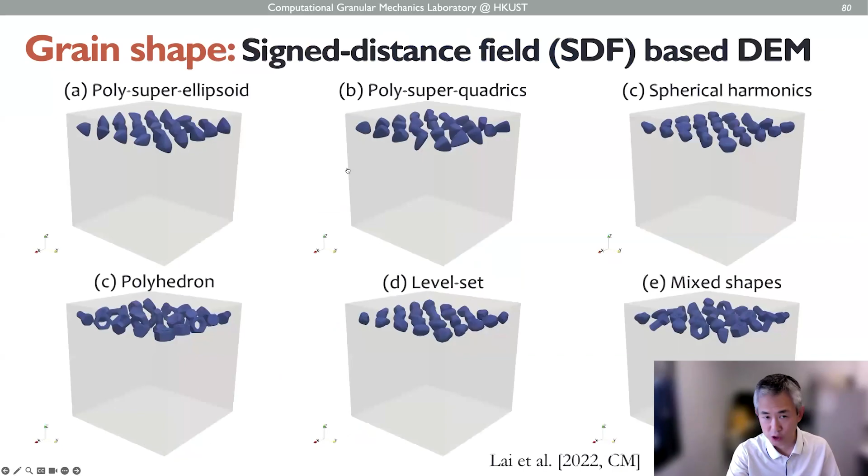And further, we have developed another approach, still using SDF, to generate more complex granular particles. This is a coral particle here, okay? Coral sand is featured by double porosity, in that each individual coral sand grain has internal pores. And when you put an assembly of coral sand together, they have interparticle pores as well. So we have this dual porosity structure.

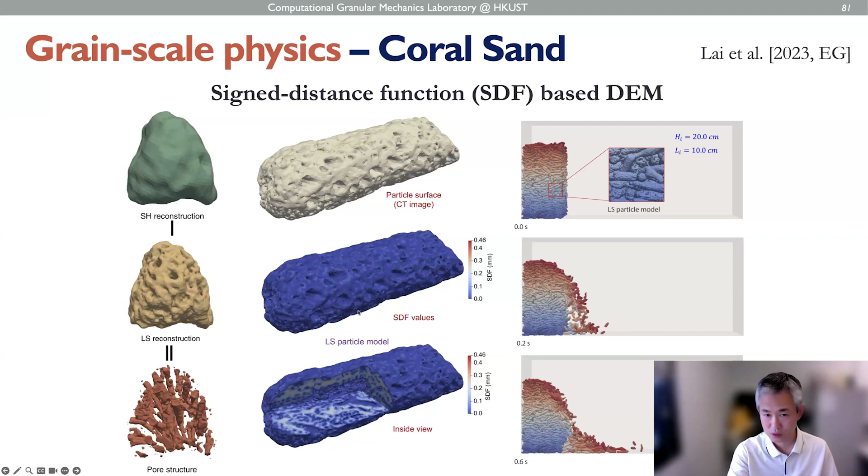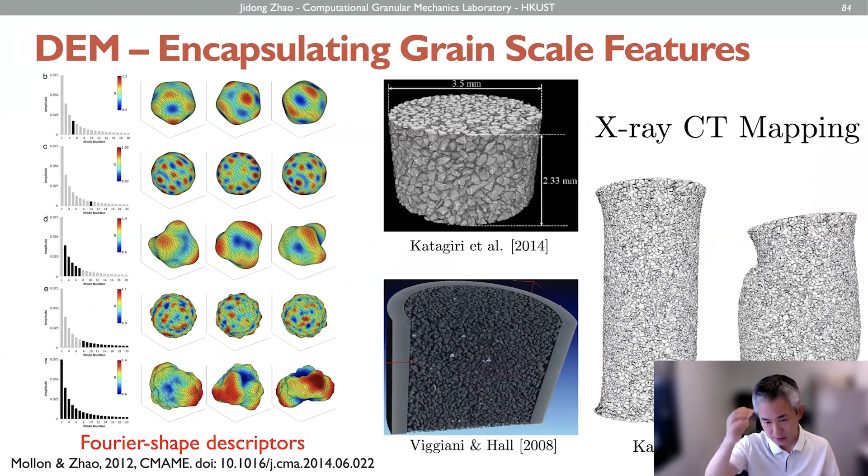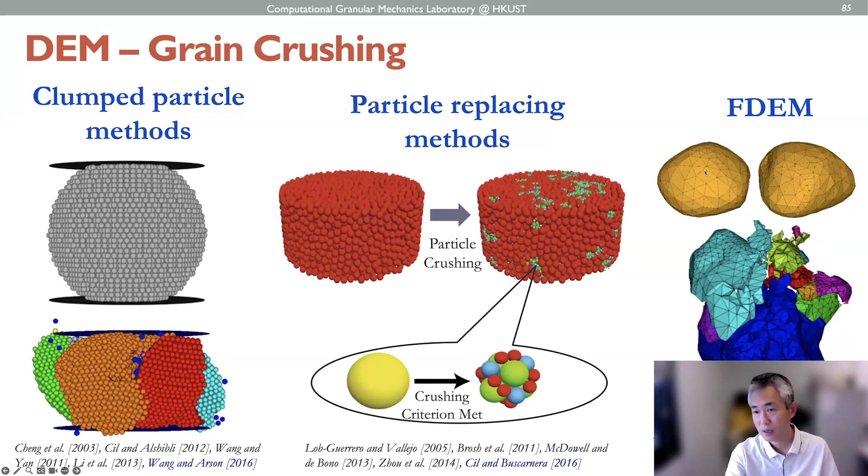And a third method is FDEM. Basically, each individual particle is meshed by FEM, and then you use FEM and assume certain constitutive models for each FEM mesh to solve it. When the crushing criteria are met, the FEM itself generates breaking parts. So this is the FDEM method here.

So what we do is, we recently used a peridynamics method coupled with other methods to study the crushing. Peridynamics is a new non-local continuum-based method that simulates each particle somewhat like a bonded particle, but different. Material points interact through bonds, and the bonds can be specified with different models. It's very efficient in solving fracture, fragmentation, or cracking problems.

And then we can further incorporate the crushed child particle shape and size into the next step crushing simulation here. So what we do is for a single particle, when the crushing criterion is met, we use Peridigm to simulate it and find the crushed child particle, and then we further use the so-called CGAL, Computational Geometry Algorithms Library, to describe the surface, and then put the surface into another numerical method we call non-smooth contact dynamics.

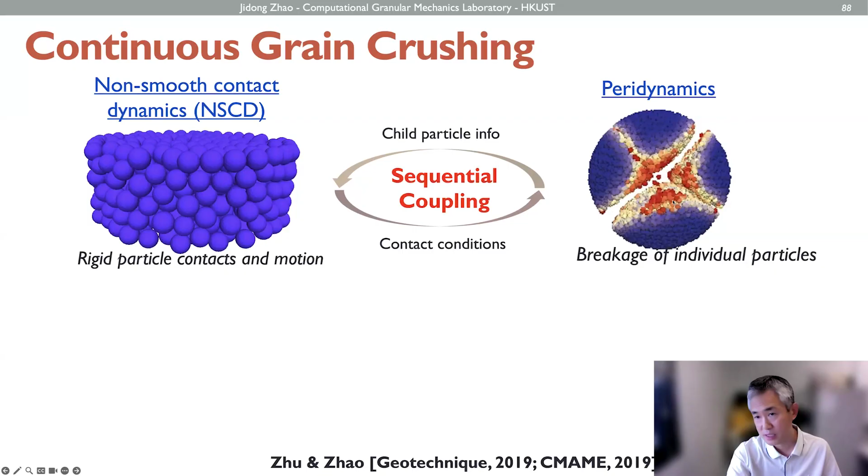If they have 4 or 5 contact points, we substitute this same particle at the same contact condition, same contact force. And then we use peridynamics to simulate it, to get the breakage. Once it breaks, the individual child particles are put back into the locations, reach equilibrium, and go on to the next loading step.

So what we do is we use either the Project Chrono engine or the Bullet physics engine to serve as the non-smooth contact dynamics solver, and we use the Sandia National Labs Peridigm to serve as the PD solver here. We use the CGAL library to connect them together, and in the whole process we respect the realistic particle shapes and size during this crushing process here.

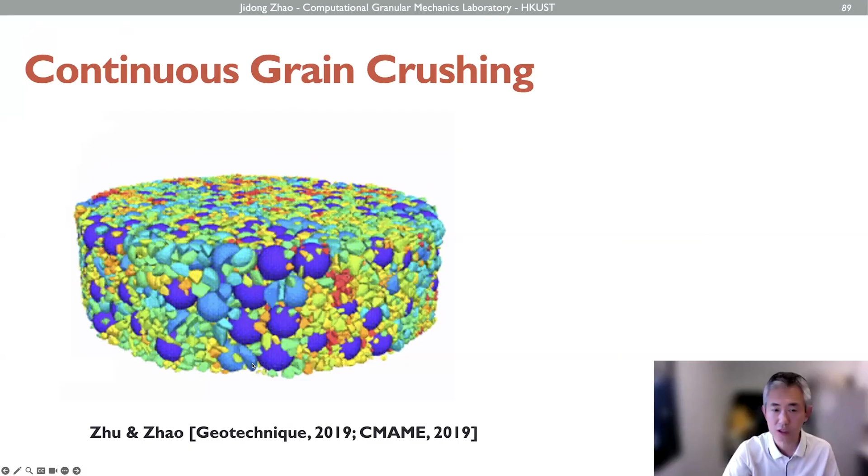So the total number of child particles can go from the beginning of about 600 particles, with a more or less uniform, slightly graded distribution, to a total of around 26,000 particles. You can continue to crush it, but with further crushing the particles become smaller. And we know that in both DEM and NSCD the computing time step depends on the smallest particle. So with more particles and smaller particle size, the computational cost will be very, very high. That is what makes particle crushing simulation so challenging to handle.

But essentially, this opens up the avenue to incorporate a very good particle crushing engine, considering realistic particle size and shape evolutions, into a multi-scale simulation platform, where we can simulate boundary value problems that involve particle crushing.

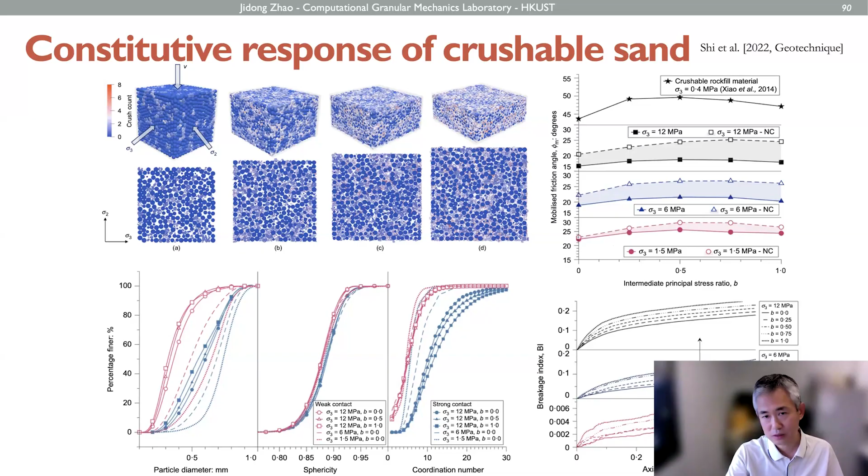And this is a further example where we do a true triaxial compression to look at the particle size evolutions, the shapes like sphericity, the coordination changes, their strengths, and also the breakage index, for example defined by Hardin for that purpose, and do all kinds of different analysis here.

So this is what I wish to show for this part: we developed a general concept of coupling a continuum approach like FEM with a particle scale simulation like DEM to tackle engineering challenges. This FEM-DEM coupling enables us to integrate particle scale physics with engineering scale loading, and to provide a solution which helps us bypass phenomenological assumptions. This gives us a unified way to unify continuum mechanics with micromechanics for future study of granular mechanics.

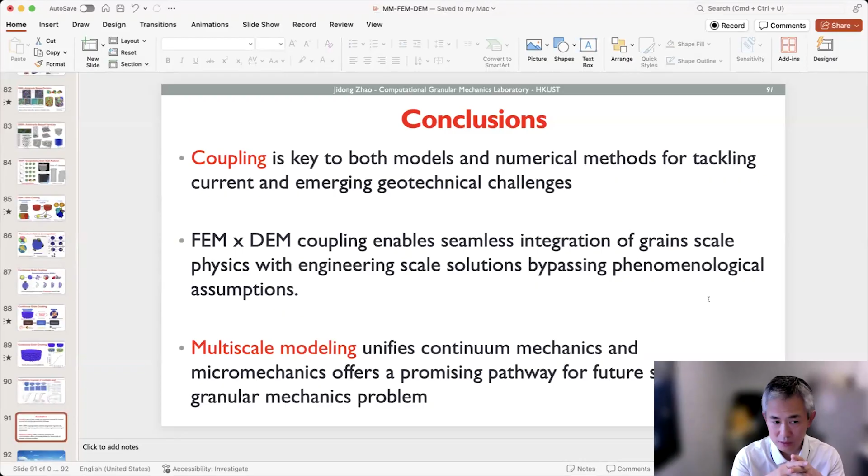And before I go on to the MPM part, do you have any questions for this part? I can answer a couple of questions before I move on.